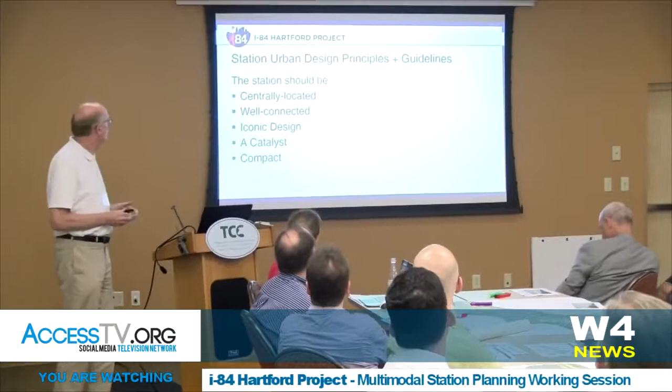So, at a very basic level, these are some of the things you might think about in terms of creating a successful urban transportation center, as we're thinking about for rail and bus.

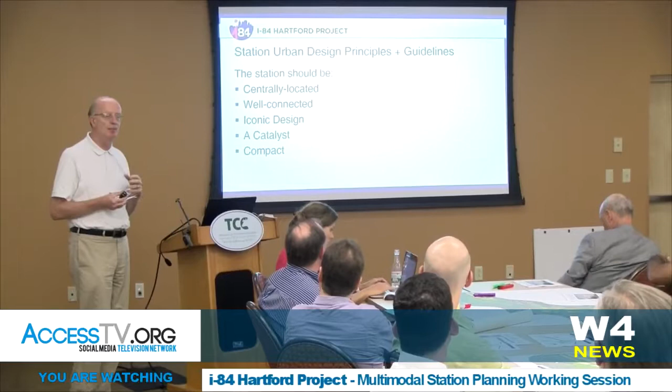It should be in a good location, centrally located. It needs to be well connected to residents and jobs. I think it should be an iconic design, something that speaks to the importance of transportation within the region. It should be a catalyst for future things to evolve and develop around it. And importantly in an urban context, it should be compact, minimizing the amount of land used.

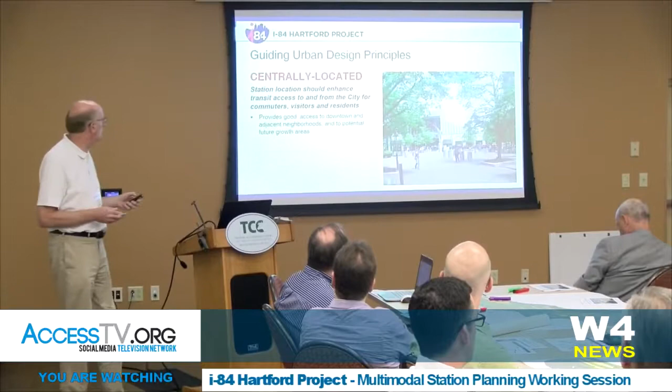So let me just take you through these — there's a handout on the table, one page where these are written down. I'll go through them quickly, one by one.

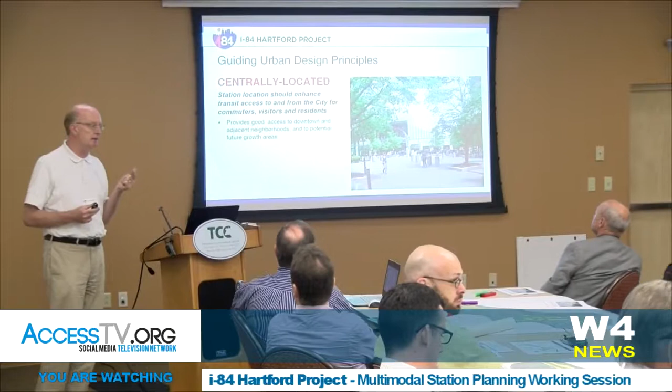Central location: I always think in these situations you want a location that serves existing businesses and existing residents, but also provides opportunity for future growth. The location should be well positioned to serve existing businesses and residents, and then look to the future.

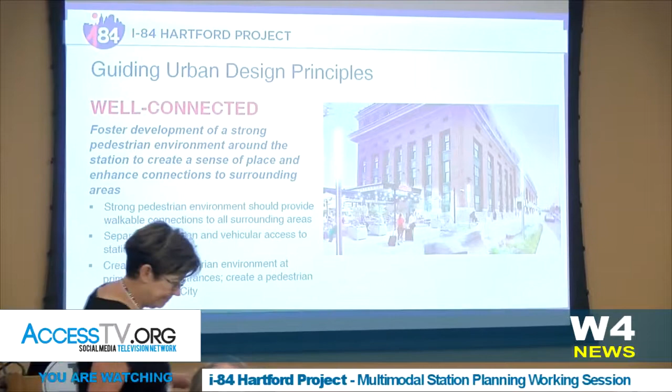Second, well connected. You can be centrally located, but if you don't have strong pedestrian connections from the station to where people are looking to go, you won't have a successful station. That's about pedestrian connections and strong bicycle connections. It also means separating how vehicles access the station from how pedestrians access it, so the flows in and out are really strong. In the most successful stations, the primary entrance is really a pedestrian entrance, without conflicts from vehicles, buses, taxis and other things of that kind.

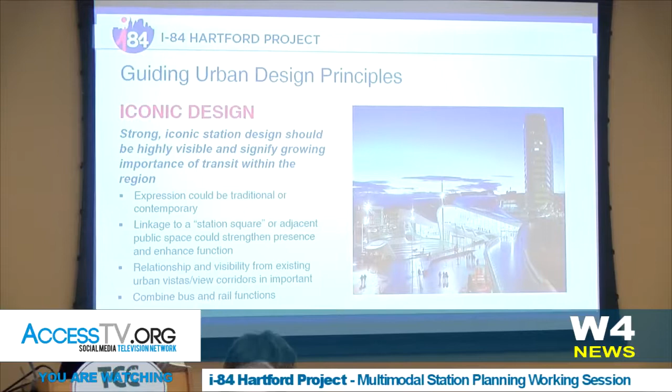Third is iconic design — something that stands out and stands for the importance of the station. There are different kinds of iconic designs; this one was shared with us last week, a city in the Netherlands — this is Arnhem, an interesting station, interesting location. But iconic could be traditional design or more contemporary design. Very often the best stations are linked to a public space around them, whether a station square or gathering place, so people can congregate and enjoy the area around the station.

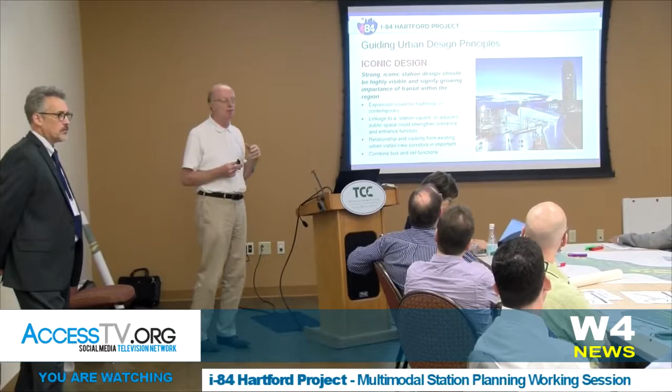I think it's important that the station is really visible, that as you look down major streets, even from far away, it's something you can see, not something buried and hard to detect. To be really successful, you need the ability to combine bus and rail at a single point. So you're really going to the transportation station, it doesn't matter whether you're getting on a train or a bus. We can coalesce all the services in that location.

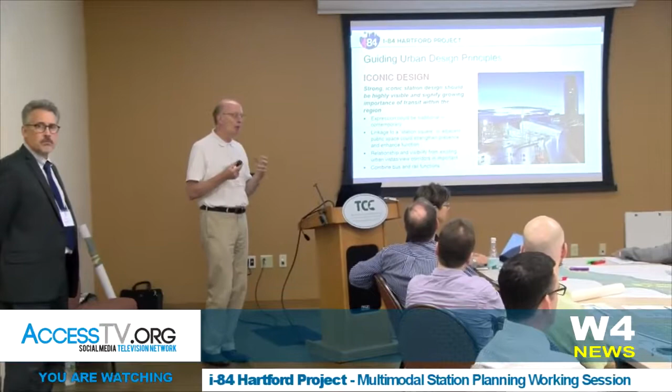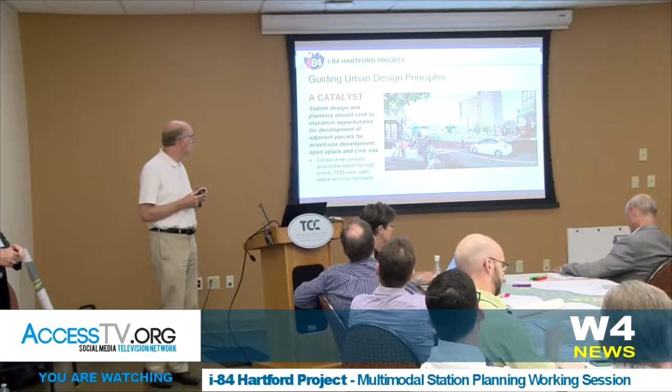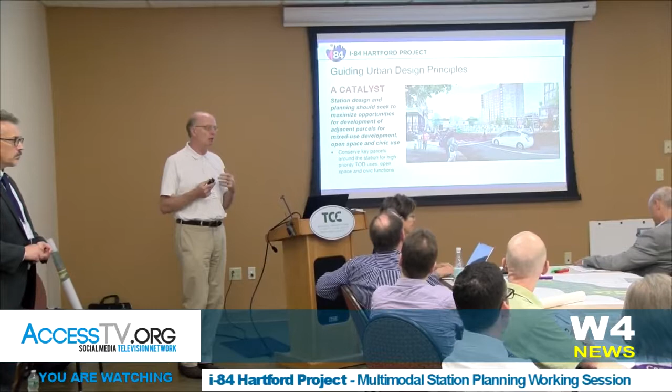So, iconic design as a catalyst, I think, means the station is in a place that promotes future growth and urban activity around it. You don't put the station on the site that would be most appealing for future private sector development. Instead, you find the right place for it and consider station locations that maximize potential for other kinds of development around it. That might be development, but it could also be open space, civic space, or civic uses and functions.

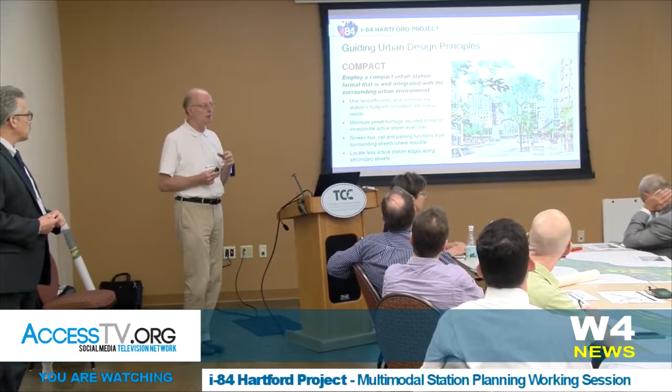Last, you're really looking for a station that's as compact as it can be, so you can maximize opportunities for open space and other kinds of development, rather than a station that spreads out and takes over the district. This also raises questions about how much frontage the station has. Stations can be very large, with frontages hundreds of feet long that are relatively dead when there's not a lot of activity there. So thinking about ways to site a station so it has active frontages facing the city, and is as compact as possible, is another consideration.

I'm going to quickly go through a couple of case studies, which offer some similarities to what we're doing. I'll start with Back Bay Station in Boston, talk briefly about Union Station in Connecticut, the Amtrak station in Providence, which is part of a much larger development with many similarities to the issues we're dealing with here, Portland Maine station, which is less of an urban station, and then very briefly South Station in Boston.

So let me take the first one, Back Bay Station. In each of these cases, the station is centered in the middle, and we've drawn a 5-minute walking distance. If you're familiar with Back Bay Station, it sits between historic neighborhoods on one side and a downtown environment on the other—in many ways similar to the siting of a station in the Asylum Hill area, with downtown on one side and neighborhoods on the other.

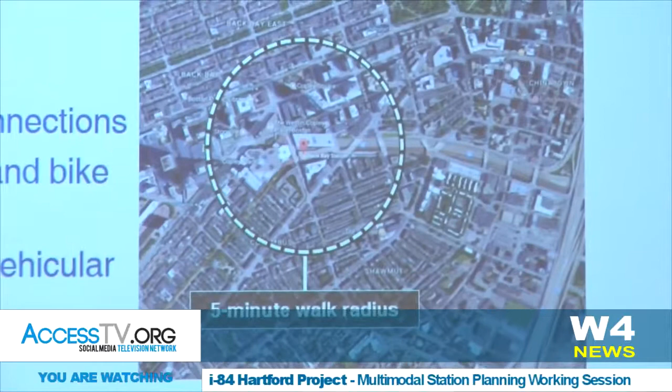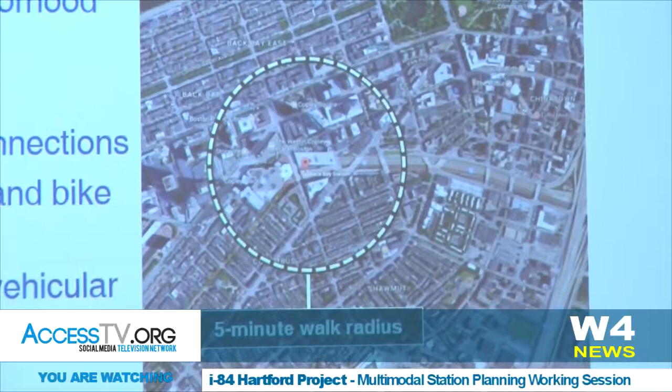It's a pretty iconic station design, with very strong bicycle and pedestrian connections. It's actually at the terminus of the Southwest Corridor Park, a major pedestrian and bike corridor that feeds into the core of the city. The station does a pretty good job of separating how buses access the building versus how pedestrians do so.

It's surrounded by mixed-use transit-oriented development, and has pretty successfully integrated a below-grade rail line, such as we have here, and a below-grade highway. It works all those things in ways that, when you're looking at it on the surface, it's pretty seamless—you wouldn't really think that's what was going on. It's been reasonably successful, but not perfect, in terms of integrating parking and retail as part of the station complex.

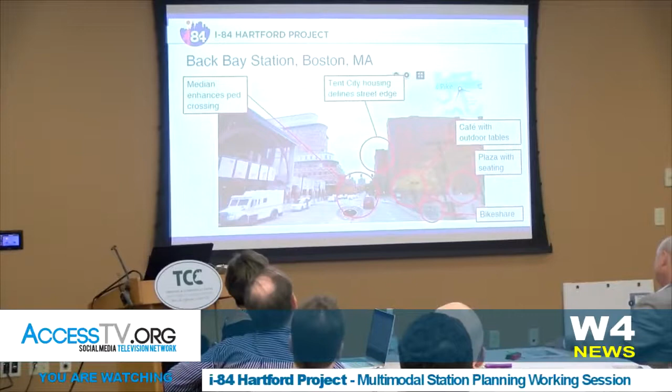So this is the station. We're in the park that comes up from the other side of the street and really ends with the station—there's the station in the middle. This is the housing development, cafe space, and open space, high quality, that really focuses on the station building you see right there. Looking at it from the street, it does a pretty good job in terms of the front. Taxis do pick up and drop off there, but the buses are not there. You see the bike share station across the street, and the park moving off on that area—it makes a pretty strong impression on the streetscape, and includes some retail along its frontage on the street.

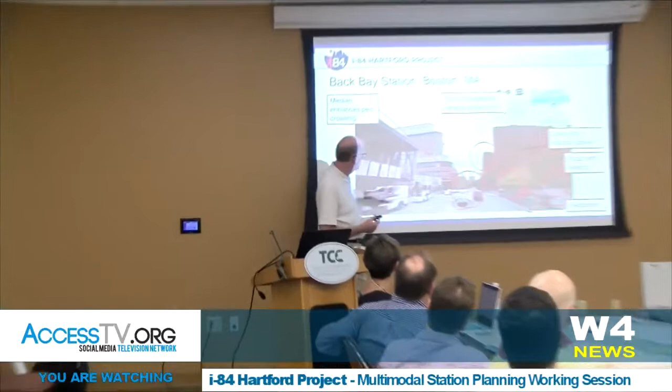Which is the station—is it the tall building in the back? The station is this building here. You can see the arch, the large station hall, and there are lower wings on the sides. This side has a small restaurant inside, along that edge of the street. So what we've got here is the station building.

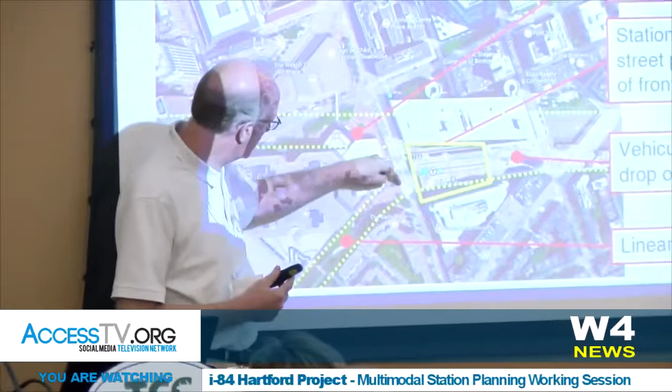Here's the garage that's beside it. This is the Southwest Corridor Park I talked about, where the rail lines below that park connect up here. This is an important bike corridor. The station sits here, and rail lines continue through there. I-90, the Massachusetts Turnpike, is coming through here and goes below this garage structure.

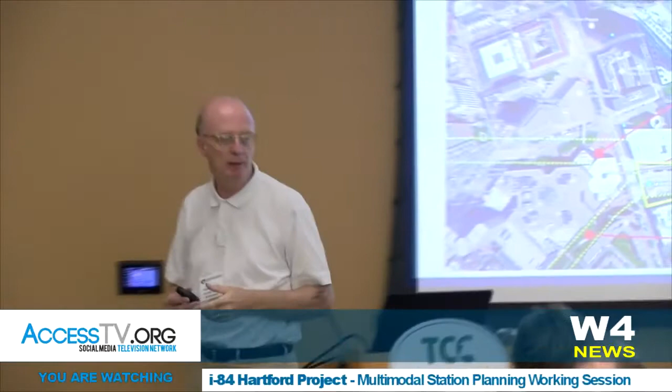On this location, we've got street level retail all around here, with open space and pedestrian plazas over the highway that comes below these streets. If you're in this area, you really wouldn't be aware that either the rail line or the highway is going through that corridor. There's a drop-off, pickup area here to the back where buses come in and out.

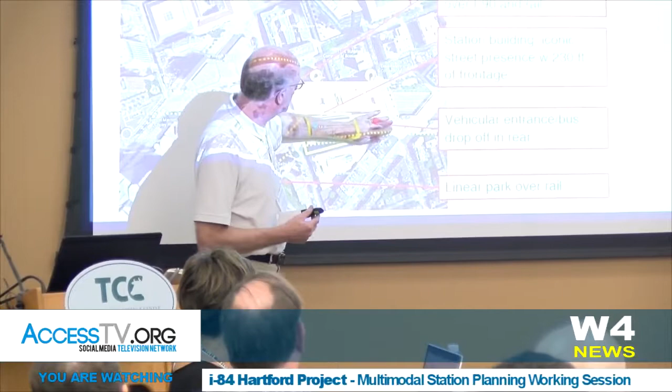So a lot of things here I think are relatively similar, and many of them are done pretty successfully here. It does have this unique combination of below-grade rail, highway, parking structure, and station that fits pretty well with a historic street. So, next, very quickly, Union Station in New Haven.

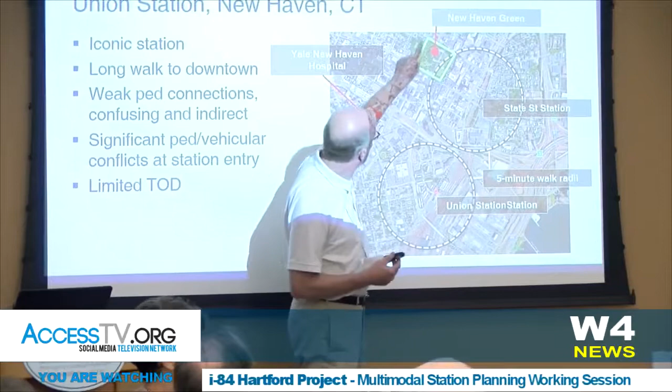One of the big struggles historically with Union Station is that it's too far from the center of New Haven. So what you see, I think, doesn't really meet the standard of centrally located. It sits right here. This is New Haven Green here. So that's 5, 10, 15 minutes away.

The area around the station is something the city's working very hard on. It's a very confusing area. There's a lot of disconnected streets there. It's pretty confusing. The city's working hard on solving these problems now, but for more than 30 years very little's happened around the station. It's sort of a little bit beached in that area.

And the State Street station, as you can see there, doesn't have quite the same service, but it's certainly better located in terms of its connection to New Haven Green.

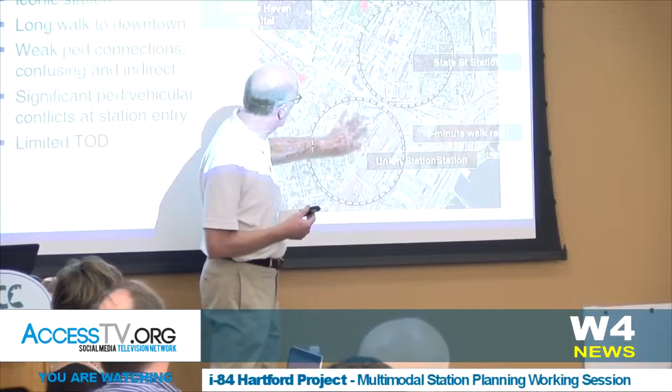One of the consequences of just how poor this pedestrian environment is, and how hard it is to figure out how to get through here, is that we have a tremendous number of folks who work at Yale New Haven Hospital, which is literally a 5-minute walk from the station. But many of those people are getting shuttle buses because it's just confusing. It feels like it's much further. It's hard to get there.

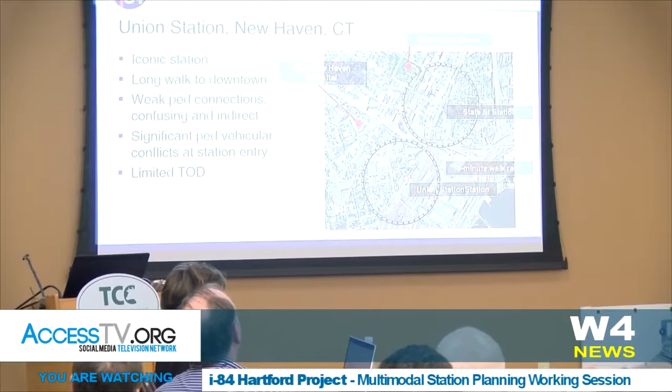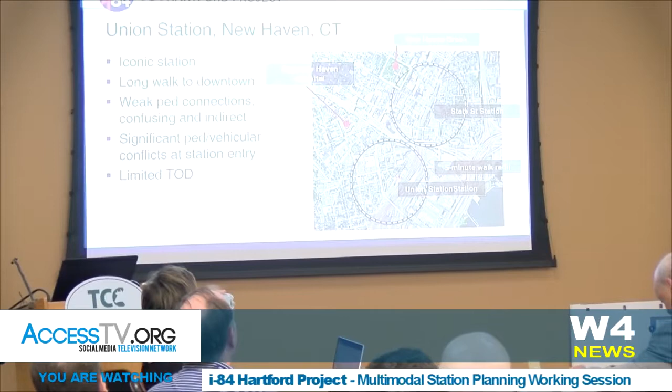So we've got weak pedestrian connections. They're confusing. As you come out of the station, it's actually a beautiful station building, but there are shuttles and taxis and confusion, and if you're a pedestrian you're fighting your way through all of that. That's something, again, the city's working on. Just because of all these factors, it hasn't been a very successful area in terms of supporting additional transit-oriented development, which would create the kind of environment that would make it pleasant to walk through.

Next, Providence Station is really pretty interesting. This station was relocated as part of the Capitol Center redevelopment. The station has really become the anchor for a whole new development district, which continues to evolve. It's probably halfway through its evolution. Like us, the station is below grade. It was above grade, but it was pushed laterally into a hill and then dropped below grade.

There are pretty strong pedestrian connections between downtown and neighborhoods, and also good access from the new station to the Capitol complex, in a way that's pretty similar. And in this case, the new station left the existing station vacant, and that's been really successfully reused for a different purpose.

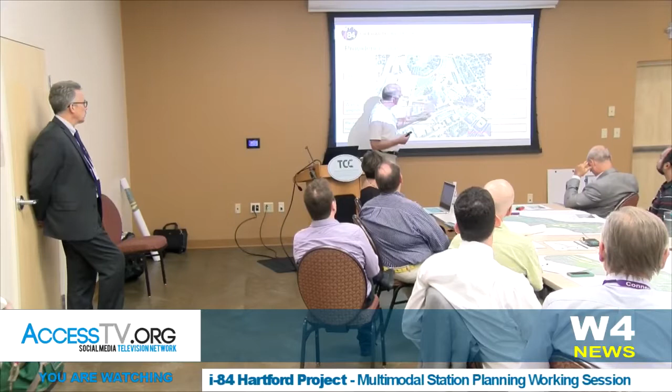This development has been master planned so that you've got mixed-use development, a number of housing towers. This is headquarters of Blue Cross Blue Shield, a number of housing and mixed-use development projects, and then this important civic space here, which is Water Place Park, where there are many different kinds of performances and civic activities, but also an open corridor that maintains views of the Capitol coming down to this new street, which carries a fair amount of traffic but is a well-designed street. That's Memorial Boulevard. I think this has, in many ways, many of the pieces we're working with.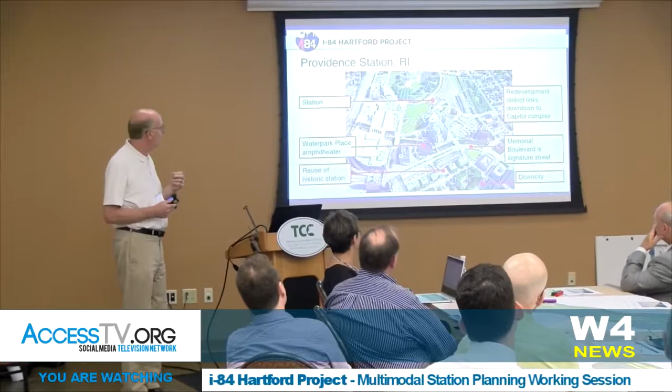It's a new development district. It includes open space. It connects to the city. The train station is one of the catalysts for development, and it's fairly compact.

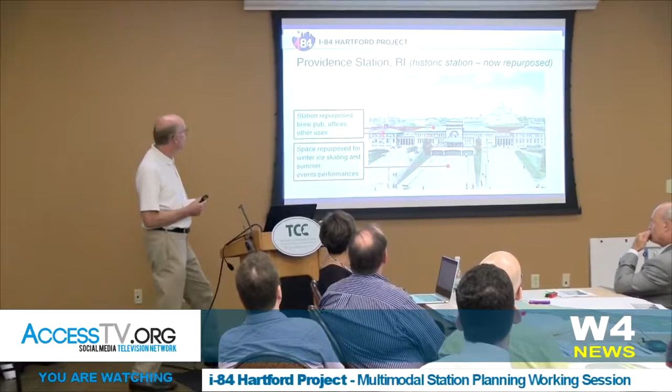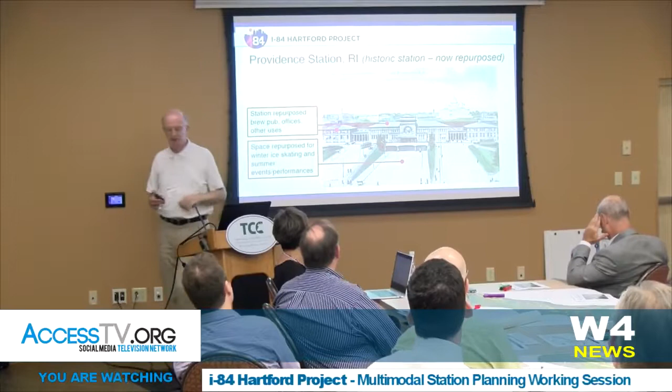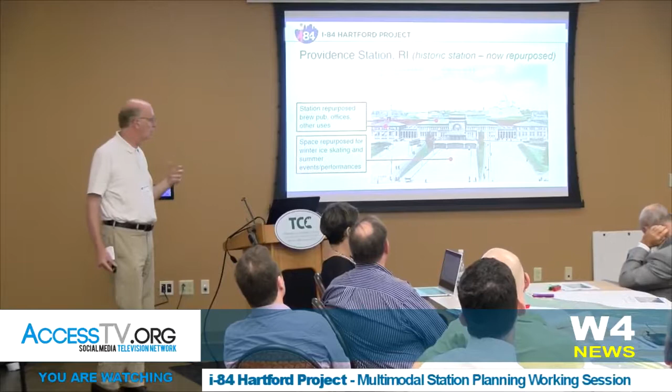This is the historic station. As on this postcard, it was called the New Union Station - no longer new. This building has been repurposed. There's a brew pub, the Providence Foundation has offices there, and a range of other uses. There's park space here on either side, and this area, which was an access point to the station, is now a space that is an outdoor ice rink in winter, and it hosts performances and events in the summer. So that's something where the station is really being effectively used.

But one of the things this whole project did is it really opened the city up to the Capitol, which at that time was really separated by rail lines in that location. So I think there are some lessons here.

Is the building iconic? Well, I'm not sure it quite gets there. It's a fairly modest building. It's clearly being designed to be somewhat sympathetic to the Capitol, but that's one side of it. Not looking so good for a pedestrian in this particular image - it's a little better than that in reality.

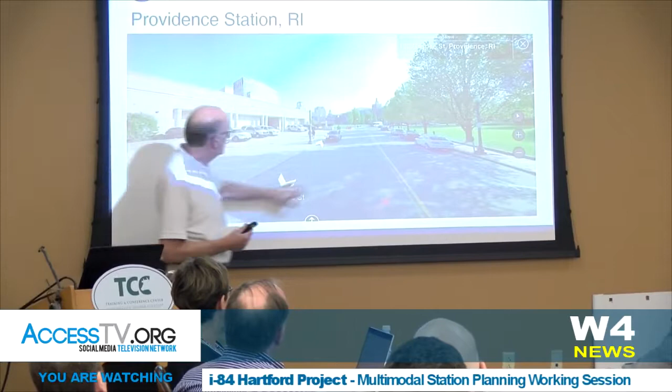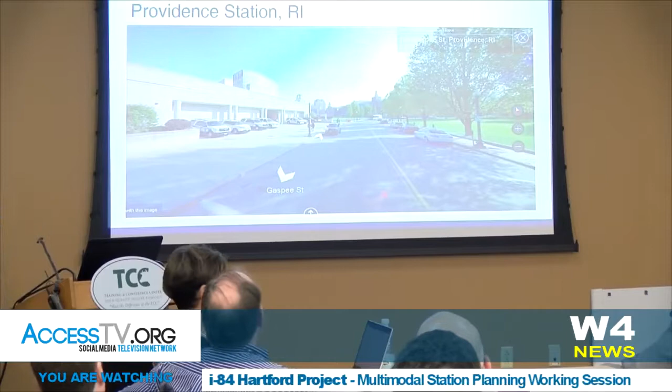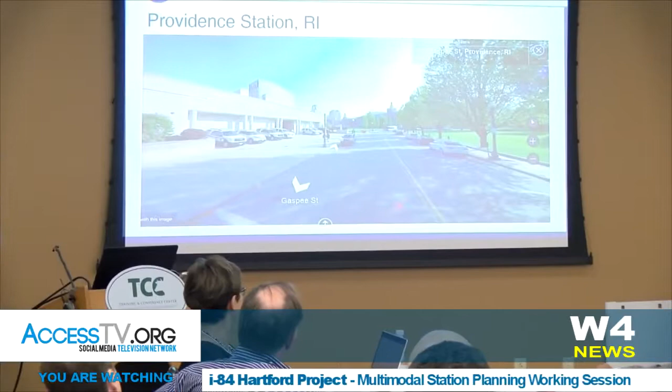And then the other side, this is the station facing the road which goes up to the Capitol complex. This is not a successful station edge on that primary open space. The vehicles here don't help. I think one could argue whether a one-story station building is the right use for that kind of park frontage, or whether there were opportunities for more significant amounts of development there.

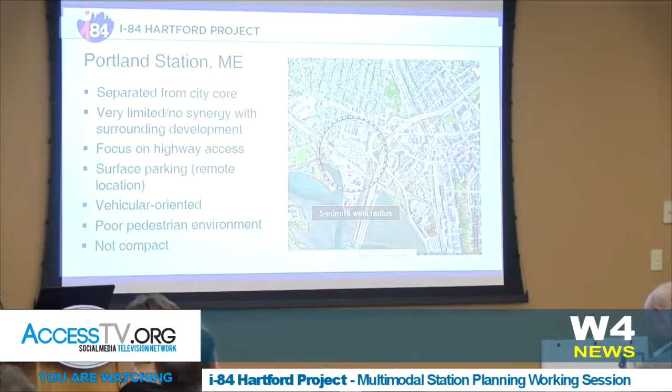Portland, Maine - I'll go through this very quickly. This is again not a centrally located station. I think downtown Portland is over there, and that's where the rail line is. I think there was an interest in development springing up around the station that really hasn't materialized. It really focuses on highway access - it's vehicular oriented. This is what it looks like. It's not compact; essentially the bus station and the train station spread out. It's a parking environment, not a pedestrian friendly environment.

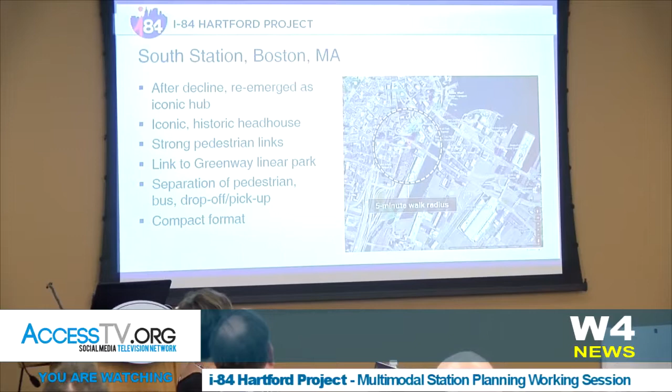And then lastly, this one very quick - this is South Station in Boston, which has been an interesting story, because South Station really was a declining, shabby transportation center 25 years ago, and it has reemerged as an iconic, vibrant place in the city. That has been part of the Big Dig, in that there were large highway viaducts that went in front of this building, which are now gone, and it's the end of a major urban greenway.

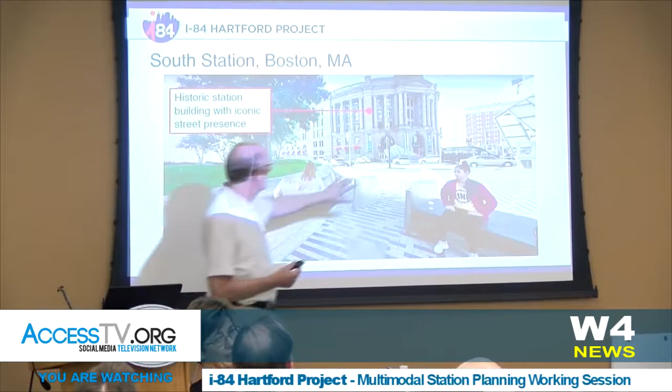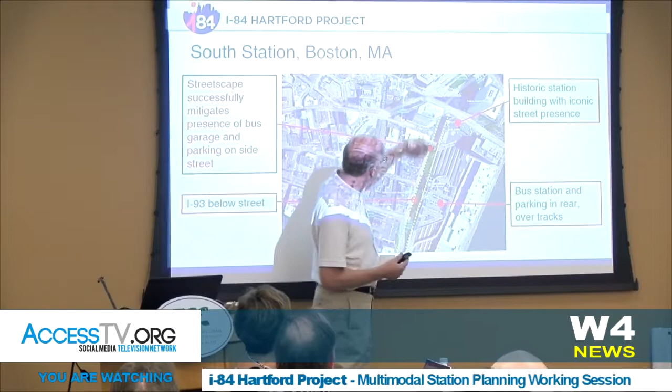The building is being rehabilitated. But the one thing I wanted to talk about with South Station is that's clearly how it looks from the front - classic, iconic station. Some of the new access ways go through these pyramid structures to let people go under the street. But the point I want to make, I'll also say here, is that this is a case where the streets on the side of the station have highway elements below grade.

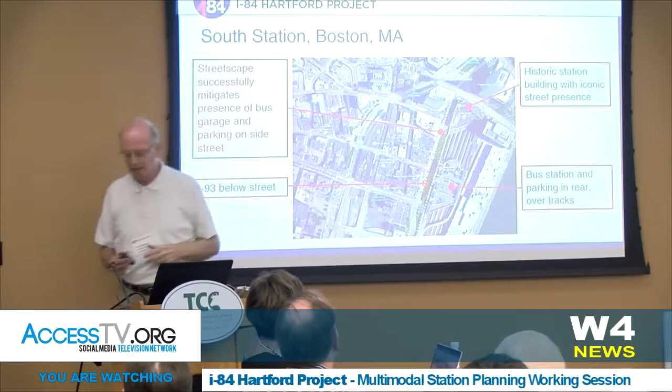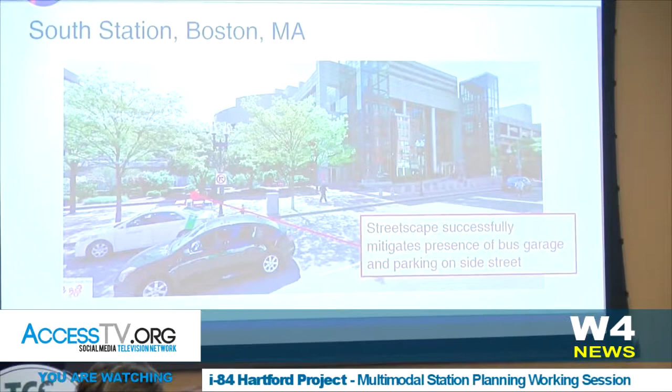This is the train station, this is the bus station behind, and there's parking on the roof over the bus station. This is the most visible and prominent part, but I think they've done a pretty good job on this side. One of the difficulties sometimes with these stations is where you get the long edges, particularly of bus stations - they don't make particularly appealing urban street edges. But I think they've done a pretty good job here. That's the bus station on the right. In terms of creating a street that's got appealing landscape, the pickup and drop off works pretty well, but importantly the buses aren't going in and out here - that bus access is really separated from the pedestrian access. And I think that's the last one.

That will help as Bill talks through some of the thoughts the city's coming forward with in terms of the station, or elements of this station in the district, and how that might work.

I'll just add before I stop. One of the conversations we've had is, are we confident that this area is the right location for the station? It could be north or south of Asylum. I think our team's pretty confident this is the right location, and it can meet each of these criteria we've outlined, but how well it meets them ultimately relates to how the station is designed and how it relates to the environment around it. These are very critical design questions.

Thank you, David. Hi, I'm Bill Kenworthy. I'm a principal and leader of planning for our New York office for HOK. I'm going to talk to you a little bit about what might be the end of the story. These guys have built up such great ideas, Tom and David, about the connections to the city, the DNA of the train station. Now my drawings are really about what that might mean for Hartford.

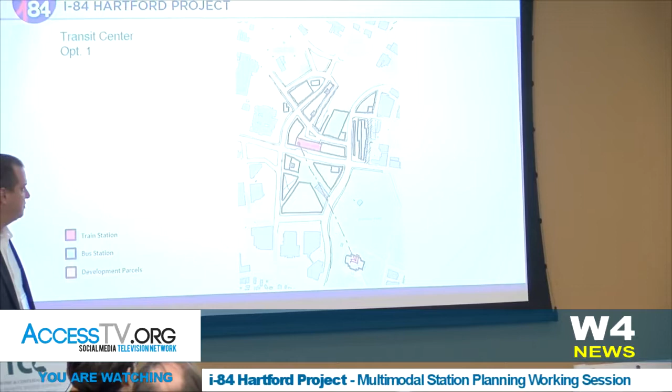These are just some initial sketches and ideas about how a train station, a transit center, and the surrounding development might fit into the city. This first sketch shows a train station in red north of Asylum, a bus station in blue to the east of the highway across from the existing train station. Green shows potential open space connections outside of the street grid, opportunities for public realm and park spaces. The orange in all these sketches is the opportunity for new mixed-use development around the stations.

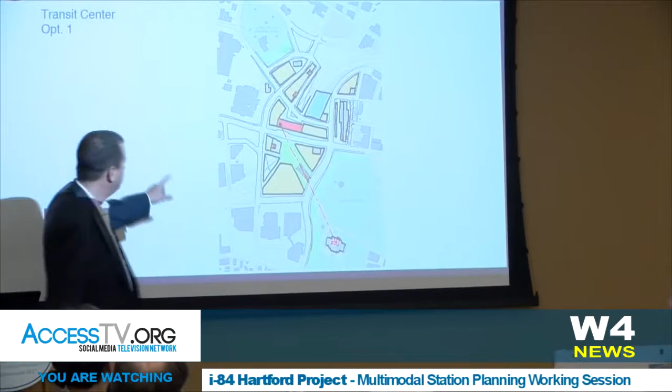Where are the highway ramps coming out? At the moment, this is consistent with the trans systems options they talked about, coming out on Bushnell West, and another one on Edwards. But the real strategy for the story is about putting the train station to the north, with the bus station nearby, as close as we can in terms of that compact footprint.

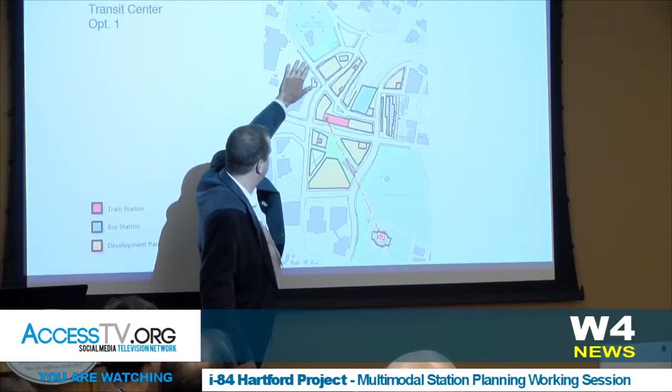The idea is connecting Garden Street down maybe to the back of the train station as an opportunity for vehicular drop-off, so you can keep Asylum clean in terms of drop-off and loading. There's the opportunity to have more robust drop-off back here, and a street connecting into Spruce, where the existing station is, to take a lot of that loading and servicing for vehicles off of Asylum.

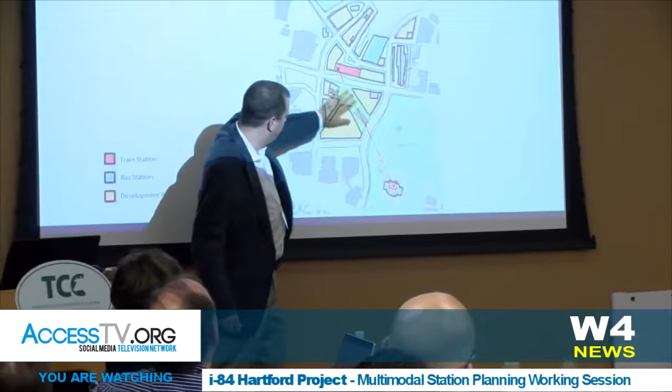The other idea is really a diagonal connection through the blocks south of Asylum that could create an open space and visual corridor up to the Garden Street area and Asylum Hill, down to the State House and Bushnell Park. You see the residual areas for opportunities for development around that.

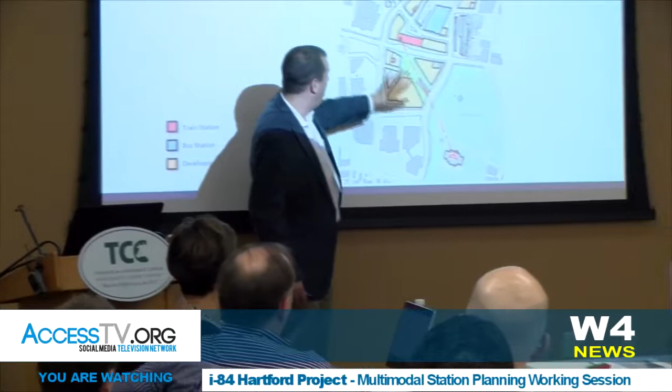In this location, we're showing maybe some access drives around the bus station and new development. This could also be decked over open spaces connecting east-west, but not focused on building development on top of the highways, since that's more of a challenge. We're looking at creating development around the highway that allows for connections and even an opportunity for more open space over the highway locations, while trying to keep development off the highway and ramp footprint itself.

So this is one idea about how you might be able to develop a transit center and mixed-use framework of development around this part of town.

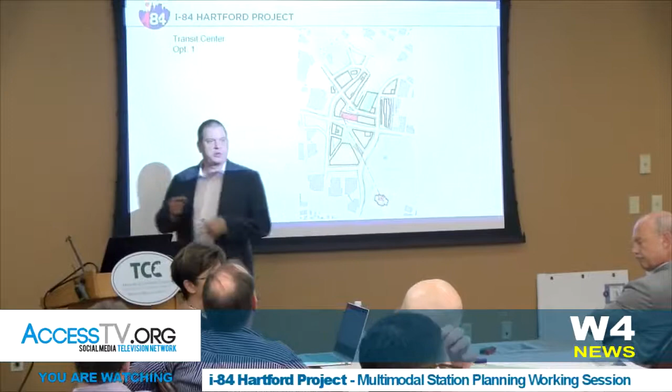How do the buses get routed? The buses could either work off Spruce here, or there might be options to bring them off this new drive coming through here. So there are two street frontages where bus connections could work. That's part of the program we're still studying in terms of operations, how that would actually work in this part of town.

I'm glad everyone's immediately excited about the ideas, but these are really just formative thoughts. One of the goals of today is to get your reaction, to begin thinking about how the train and the bus, CTfastrak, and the developments all relate, so that as we continue to evolve these notions of how this fits in, you can tell us what you see as being really problematic, and what you see as possibly really effective.

So, we don't know exactly where every stop and spot is, but this is an attempt to begin that process. So, if we could just jump back...

I have looked at this, and one of the things that concerns me is Asylum Avenue is going to become a very urban street, and the station being right at the street frontage really doesn't allow for an open space that you really want to have in front of the station. I don't have anything against the solution, but I think this could be improved if the station was set back from the street, maybe the depth of the station itself, to allow that open space in front.

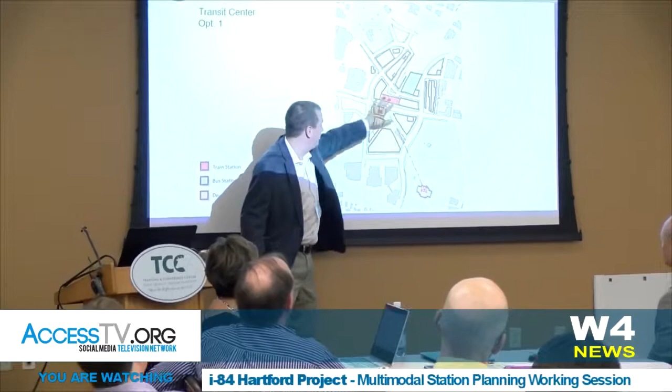At the size of the sketch, we're starting to suggest that. We can certainly add more. There's about 30 feet of sidewalk in front of the station from the drop-off area. There could be even more, though. We could study if there's greater open space. The intention here was to try to begin to shape that on the north and pull it through, so there's the beginning of that network. But that feedback is very important for us.

If I could just talk about the option to the south, because that gets at another configuration of open space and how we might do that. Because the connection to the city, the opportunity for civic spaces around the train station is something consistent with many of the train stations we've seen in the studies that David and we have done looking at the opportunities here. In this case, we're looking at a location south of Asylum.

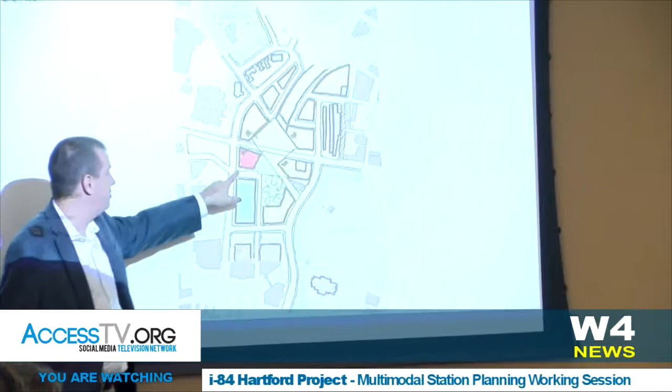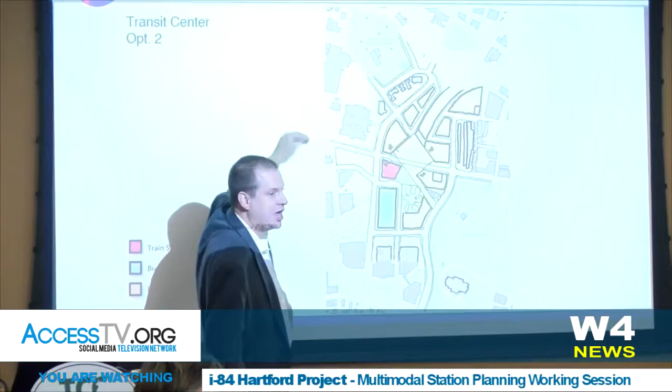We've redirected Farmington into our development through here, breaking the Trident that way, locating the bus station to the south of that train station. Breaking the Trident allows us a couple things. It allows us to stick a nose of that train station up into the view corridor from Asylum from downtown, looking up the hill, so you could have a very visible location for your train station, as well as from the west down the existing Asylum and Farmington geometries that exist today. So this building becomes very prominent in this case.

Would that be prominently visible from the park, with the orange development sites you've shown between the two? If that was really important in this scheme, we could find a way to begin to cut the development back so you can maintain those view corridors up.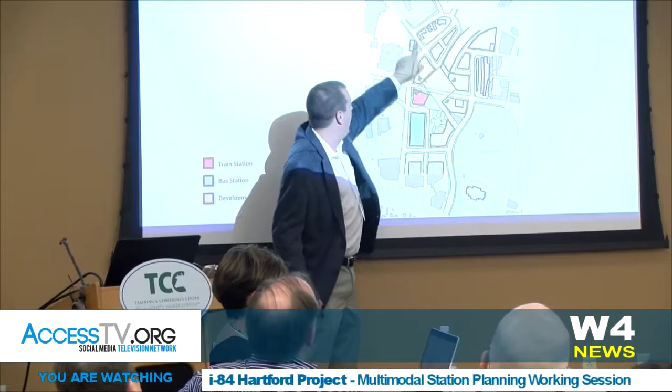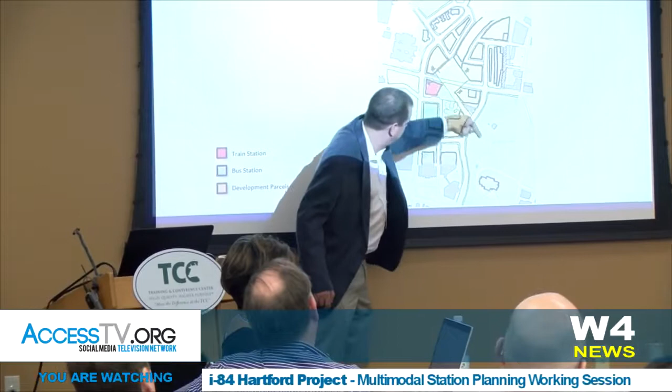In this case, it's a little bit of a different option. We're looking at bringing a square along Asylum to create opportunities for address for the train station as well as the new development, to create an opportunity for open space over the highway area. Again, you don't want to build buildings over there. And to keep the continuity of the Garden Street corridor, not necessarily through that square but into this development area, and then the shifting of that alignment down so you could have a connection to the park this way. A smaller aperture than we were drawing in the previous scheme, but just another way we could connect through and create more opportunities for development frontage on the park.

But again, these are initial ideas, so if everyone thought we should open that up more, we can make a better connection. And where are the highway ramps?

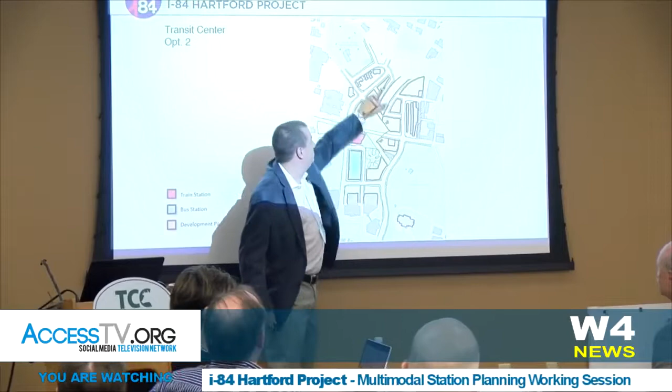The highway ramps in this case are still reflecting the scheme that was presented by Trans Systems. They're really looking... okay. Well, again, I think the idea here is to use that template of where we're looking at the ramps to begin to see feasibility of integrating and building in. I think we are all working together to look at how those ramps are positioned exactly and how they relate to the local street system as we go through this process.

The ramps can probably be nudged here and there if they had to be, too, couldn't they? So in this scenario, Broad Street, which sort of terminates at Farmington Ave, and in some of the other scenarios, would become a higher volume motor vehicle traffic street.

So in that case, I would say it's crucial to restore, for bikes and pedestrians, the north-south direct route of Flower Street, because then we lose... we gain some available passability. It's still not direct, but when that gets cut off, we lose that in this scenario.

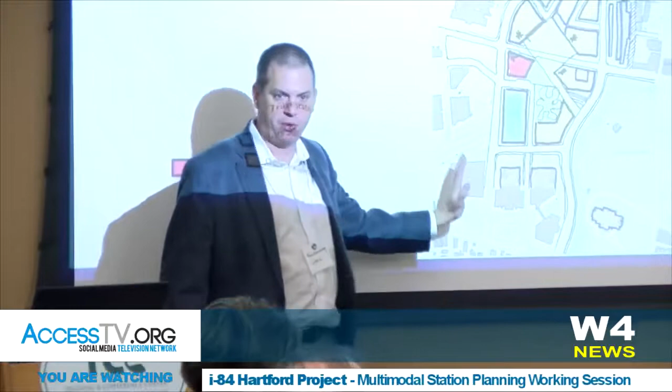We could enhance the connection of this diagonal garden through a square, through a park space here and down through here. Would that be a suitable route that could be taken north-south, or do you need a more direct route? No, from Broad, because we're trying to go that way, not a mile out of the way. That's important.

I mean, we're looking top down, but when I'm thinking about this spot, you're on that street right in front of the train station, it's a steep hill. This one here? The red one going up the hill? Yes, that's correct.

Just thinking about site selection and pedestrian access from downtown to there, placement relative to the top of a steep hill - your sight line's going to be better, you're going to be able to see the Capitol from there. But pedestrians or anybody with mobility limitations is going to be a little hesitant to take the climb.

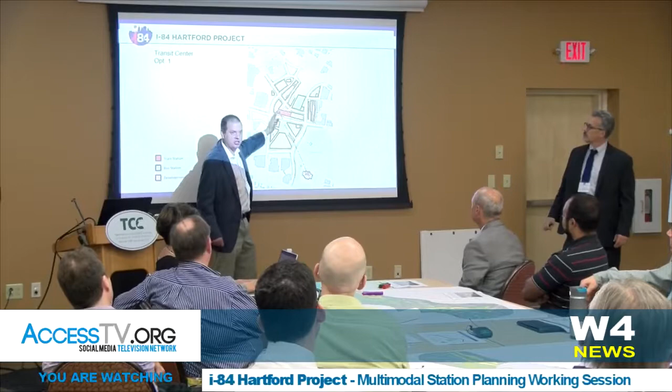So between, just to frame the conversation, in terms of the two station locations, is this any better, having a site closer this way? I think it's better. The challenge is trying to hit, at least with the rail platform location right now, is really configured here. So we need to try to get the portion of the train station to hit that in some location. That's part of the challenge, how we site the rail station at this point.

Do you have a version of this with the topographic lines? Because I think that would be helpful, so we could see the slope. We could lay that on there easily. I agree with that, because one of the things that goes underappreciated here is the elevation shift occurring across this parcel.

And to go back, I know we're talking about placement, but when we get to iconic design - if this becomes a thriving facility like it should be, it will be seen by more citizens today than almost anywhere else in town. It's the opportunity to put a really iconic design at a place that would be visibly seen from quite a few different perspectives. I'm always concerned we get so practical and functional, and then we spend billions of dollars and plop something in like a single-story concrete fiasco I saw, and you'll have lost an opportunity.

So aesthetics, I do think, go a long way. Make a statement - it will be something that can be seen from quite a few areas in downtown for quite a few decades. I'd hate to lose perspective with that. So placement and its relative views - I think of the bridge they did in Boston and how you can see it from so many different angles and how it's added to the skyline. I don't have so much concern about how it flows in and around - I'm sure you'll make the traffic patterns work, but I'd like to see us not lose focus of the opportunity to do something that's a bit of a statement here.

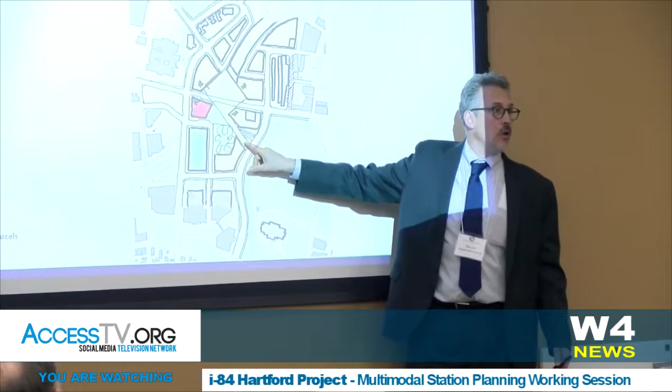So what we're trying to look at, at this scale, is there a way to bring Farmington down? We showed some pictures before of different ways of thinking about it. One of the challenges of bringing Farmington to the south or east is keeping it far enough away from Asylum so you can process traffic, and also bringing it down in such a way that it doesn't impact the ramps. So we're looking at a lot of different ways in which it can be feasible to bring it down. This is just one option.

Does that include razing the YWCA? In this particular scheme, we've kinked Farmington Avenue over in the spot where the YWCA is, but it's not required. We're looking at alignments to keep the YWCA, but still make the same option that's not as steep. So we're testing that now.

I'm just wondering, in option one, you basically put in a new bus station right across the street from the existing Union Station.

I was just wondering why you're not considering continuing to use Union Station as the bus station.

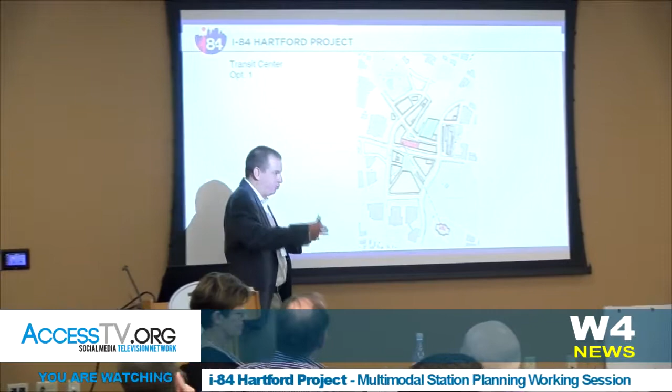Well, that certainly can still be part of the options for looking at this. We've tried to keep as compact a footprint for the transit center, both rail and buses, as we can. Also integrating the parking component, which in most cases is stacked with the bus footprint because they happen to be simpatico with the current configuration of program. But I think there's conversation about how that could be broken up into different pieces today, which may include the existing station.

And can I ask you a question about that? What would be, in your mind, the opportunity associated with keeping the buses at the existing station? Well, it's a historic building. So you'd use the buses and the fact that you put the transit facility at that location to make that part of Hartford new again. In the image, it's right across the street. What's there now where the blue boxes are is parking for Union Station, so it seems silly to me to spend all this money to build a new bus station when there's one right there already, a historic part of Hartford.

As an addition to that, wouldn't it be possible, since you're going to get rid of all the tracks and everything that go into Union Station today, that it would become a building available for redevelopment? It could be a great redevelopment use of a historic building. That's correct, that's an opportunity. I think it would be better unencumbered by any legacy uses like buses, and very attractive to a developer.

If you decide that Union Station is not going to be part of a new transportation system, have you looked at an alternative to jamming both the bus station and the train station into this area where it's traditionally been a transportation center? I wondered if you'd thought of looking farther north, say along Walnut Street, where the challenges of the topography would be less, where you have a lot of open space that's already vacant that could be used, looking up in this area.

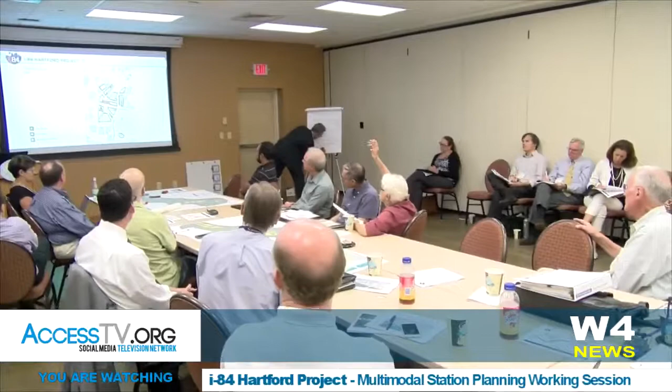I would put in a pitch for the design that Bill McCarsky and I developed together. If you start with the view corridor between Hartford and the Capitol, and think about what you put between the two — this corridor here — you make that visual connection with a transit mall that comes off a roundabout replacing the Trident, essentially a Farmington Avenue extension that goes from that roundabout to Bushnell Park West. That's where all the buses, bikes, and pedestrians go.

So the station itself — you're saying the bus facility comes down here? Right, somewhere. And the station itself is more like what you have here, only it wouldn't be blocking the view corridor. It would be a little bit south and a little bit to the right.

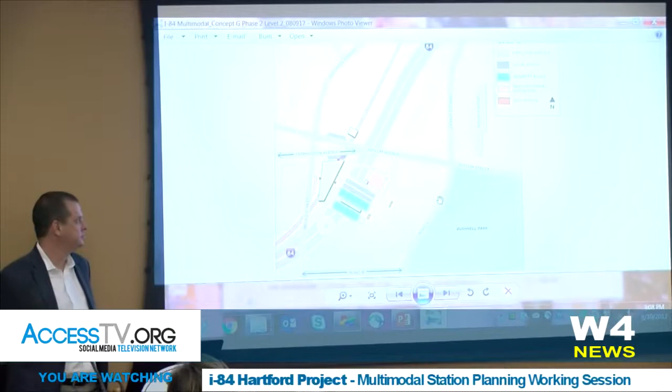Sure, so on the new map you can see the Trident configured as it is today — Asylum, Broad, Bushnell Park West is Road A with the ramps. The ramps come out from underneath the cap. So the idea here is really using that cap space between Asylum, Broad, Bushnell Park West, and this new road to constitute the transit system.

Right, that's very, very similar to — well, I'll give you a copy of this. No, I think we probably have it, but if you want to move on with this — I don't think you have a copy of this. Have you sent that one, Bill? I know, we've got a few things, we just did that last night. Oh really? Okay, I said 2 in the morning, that's why I'm not tired — clairvoyant.

But that concept also includes development on part of the transportation center to the north, like a garage that could be built in the first phase above the new highway alignment. One interesting thing about having facilities south of Farmington Asylum is that one of the CT fast track alternatives under consideration — still being filtered through the 3 or 4 we're looking at — would have a tunnel for CT fast track going underneath Broad Street and merging into this road down here.

One of the strongest benefits of having the station site here would be to allow some connectivity directly into the station site, whereas in other concepts located up to the north, a CT fast track route would be more circuitous to get there.

One thing I'd say in defense of a more southerly location for the rail station: I was asking about contour lines and topography because if a station is more or less at Asylum and Broad, and the land slopes enough, that could potentially be a 2 or 3 story building at that corner and a 6 story building elsewhere, depending on the drop-off. So you could potentially stack a lot in there.

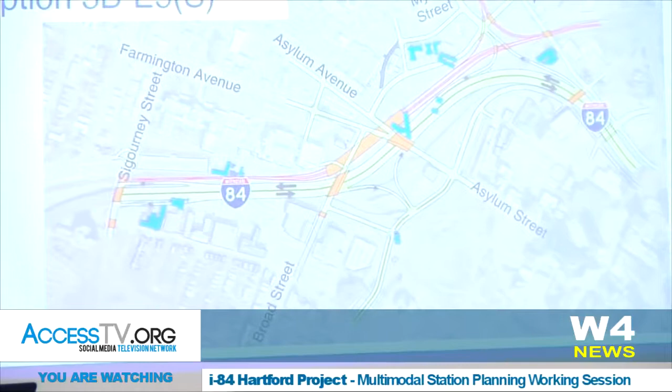So on this map, the existing highway is right here. The entire freeway is proposed to be relocated a couple hundred feet to the west. And where are the new tracks going to be? To the west of that. Are they going to be about where the 84 eastbound elevated part is right now, from an east to west point of view? They will actually be lower than that, where the tracks are coming through - they'll be at the height of where the new I-84 will be going through.

From a topography point of view, if I'm right where the on-ramp is for 84 west, and then Asylum Street starts to rise - where the tracks would be down here, relative to Broad down here - they'd be about 40 feet below Asylum Street. So they're actually at the same level they're at today, but because of the height of Asylum Hill, rather than being above Asylum Street like they are today, they're now 40 feet below to pass beneath Farmington and Asylum.

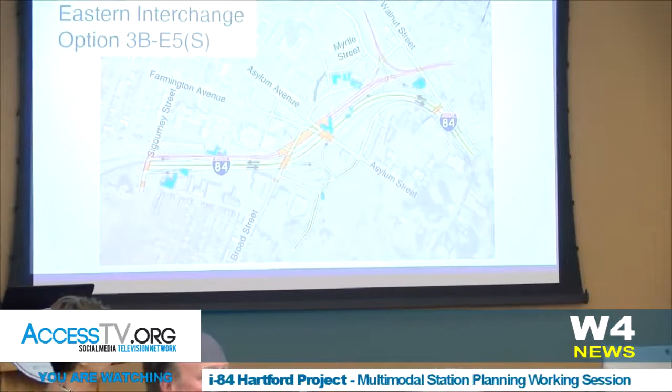So they'll be tunneled, or just totally tunneled - are you saying they'll cap around either side? It would likely seem like a tunnel as you're in the railroad. Maybe look at the 3D model - it's really going to portray much easier for you. You guys already - I'm sorry. That's all right, that's what these are for.

So let me go to the existing first - it's what you have today. So the freeway's there, goes over Asylum and under Asylum. Speak up, Nick, sorry. So today you have it like this, where the freeway's westbound lanes go underneath Asylum, eastbound lanes go over. Here you have the Capitol View Apartments, and this is Asylum Hill. Show the Trident here - and the Trident is right here.

So then without the cap, here's what it looks like. Asylum stays exactly where it is today, the freeway moves a little to the left here and down, and the railroad tracks are essentially at the same level as the freeway, but even farther to the left.

So this is, okay, and that's the Arts building right there, and the old train station. Okay, I'm just trying to, okay, yep. Thank you. Sure, thank you.

And now the question is, where are you putting the train and bus stations? Right, that's where you have to go with respect to dotting I's and crossing T's, but that's where the highway has to be, that's where the trains are going to have to be at this point. Exactly. Okay, thank you, that helps a lot.

So about three stories down would be accurate. I'd like to say that one of the problems with Asylum Avenue today is that the craziest part of it is right where it comes into a V with Farmington, and nobody who doesn't live in the area for 50 years knows how to operate that or work their way through that intersection in a car. And that is going to all be eliminated.